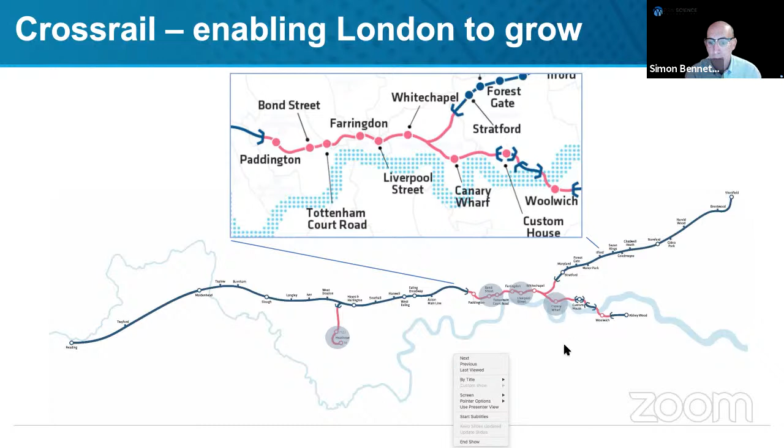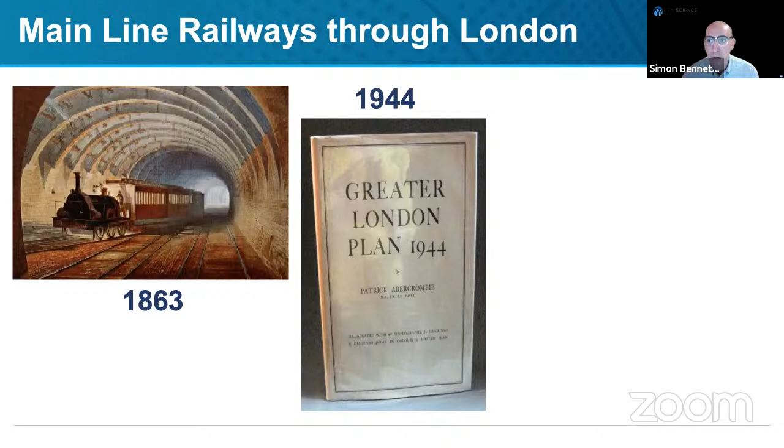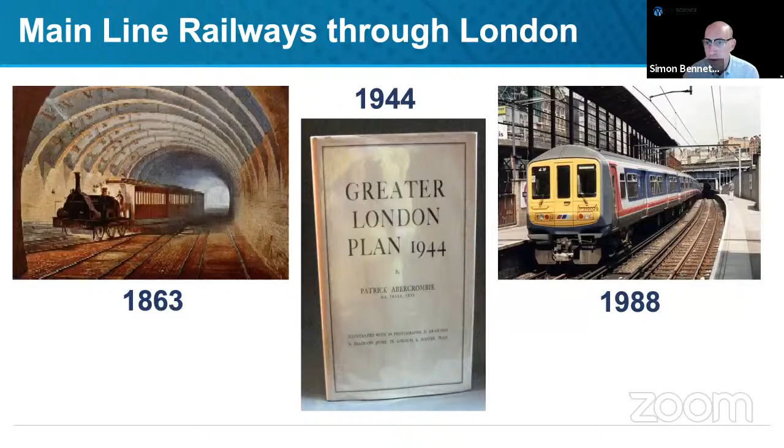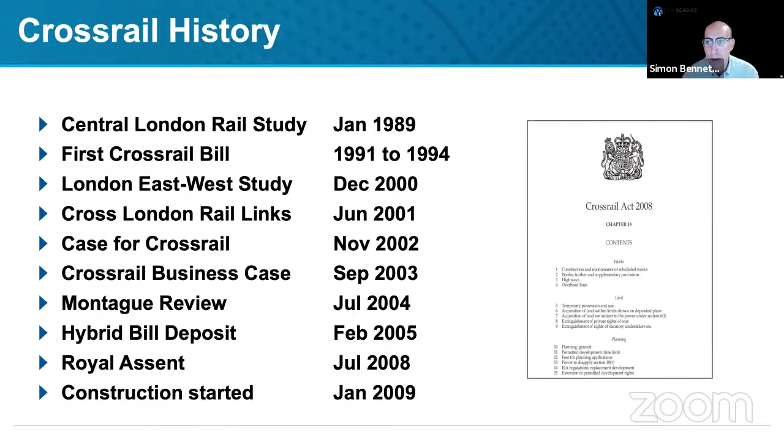And then what? Well, we have the history of the Crossrail project. There was a study done by the Department for Transport in 1989, which recommended a route east-west across London. It had a life in Parliament from 1991 to 1994, when it fell and was not taken forward. It took until 2000 for it to be resurrected, and a company was set up called Cross London Rail Links in 2001. At that point, I rejoined the organisation. We went through the process of creating a business case for the scheme in 2002, 2003. That was reviewed in 2004, and we finally got agreement to deposit a bill into Parliament in February 2005. It then took us until 2008 to get authorisation to construct the project, and construction began in January 2009.

The purpose of the railway, as I mentioned, is by providing that new capacity in the very centre of London, we create an impact on crowding on the existing underground. In plenty of areas of London, we see up to a 30% decrease in crowding on the existing underground services. Along the central line, which we directly parallel in the very centre of London, over a 30% decrease in crowding. Those are lines which were reaching their capacity and could not have continued to grow without a major scheme such as Crossrail.

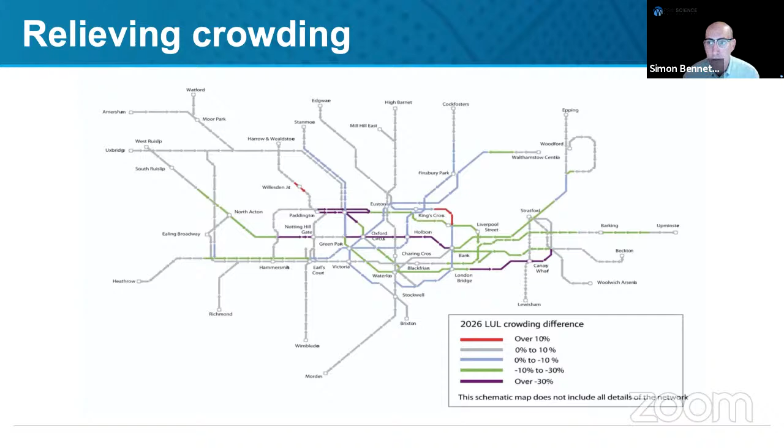We then went through the authorisation process after having passed that review. The bill in Parliament involved authorisation of our works, giving us power as the nominated undertaker to undertake the works. There are a number of requirements on the project, known as the environmental minimum requirements, which we are required to comply with, including a construction code about how our contractors must behave during construction.

A major part of the scheme is the acquisition of land, the vast majority of that being land below ground, but we do have the right to acquire that. We also have the station sites at the surface, which also needed to be acquired, and that was one of the powers that the bill gave us.

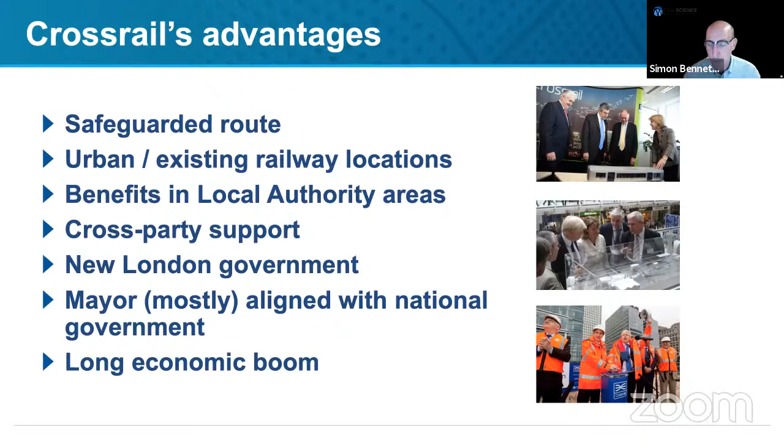Once we had the Crossrail Act, we moved into the delivery process. Here are some things which show the size of the scheme and what we had to build below ground, including 50 kilometres of track, 42 kilometres of which is brand new in tunnel, large underground spaces including a junction, and very large stations compared to underground stations - 250 metres long and much wider and larger overall than a typical underground station.

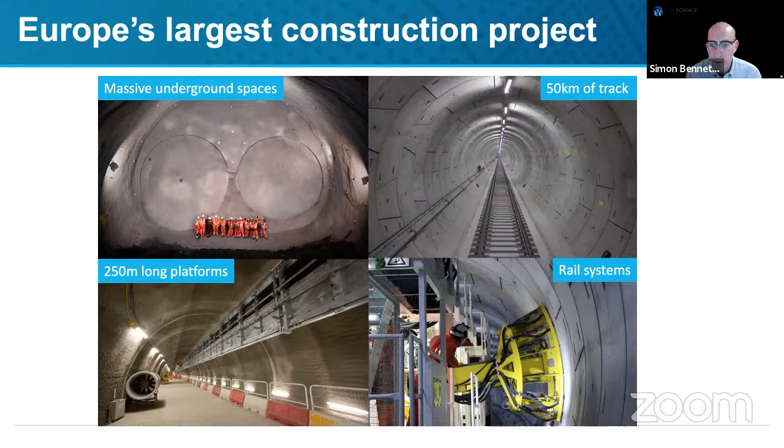In terms of governance, we are sponsored by both Transport for London and the Department for Transport, who have a joint sponsor team which sits above Crossrail and oversees it. Crossrail Limited has an independent board and an executive, and an operator which sits within Transport for London called Rail for London, who run the Elizabeth Line brand. When the project opens, it will be known as the Elizabeth Line.

In terms of funding, the reason we have those two sponsors is that the funding for the scheme comes from those two areas - the Department for Transport being national government and TfL representing London government. TfL's funding of the scheme was 1.9 billion, but it was also responsible for a larger part of the scheme through a business rate supplement levied on businesses in London, which will run into the 2030s. That additional taxation of just under 2 pence in the pound on business rates is underwriting a 5.25 billion contribution from TfL to the construction of Crossrail.

The DfT's direct funding is 4.8 billion, and there are other strands, including work on the national railway network - the existing surface routes - being done by Network Rail, of 2.3 billion. These numbers are based on the point at which we went into the scheme, and we have in fact busted this budget, and further work has been done between those organisations to fund the increase necessary to finish the railway, which I'll talk about at the end of the presentation.

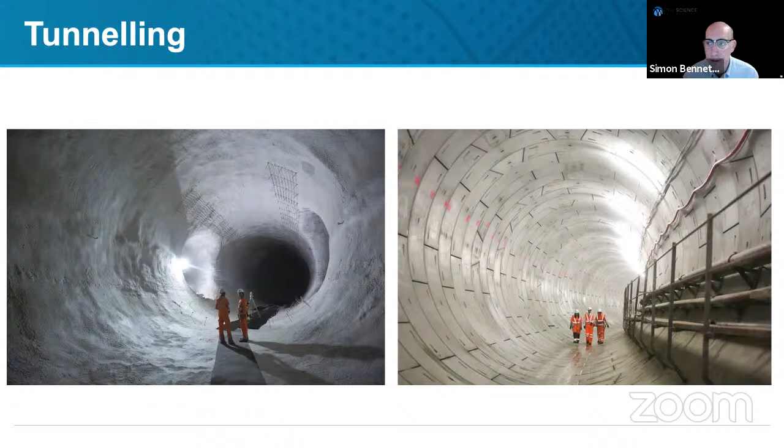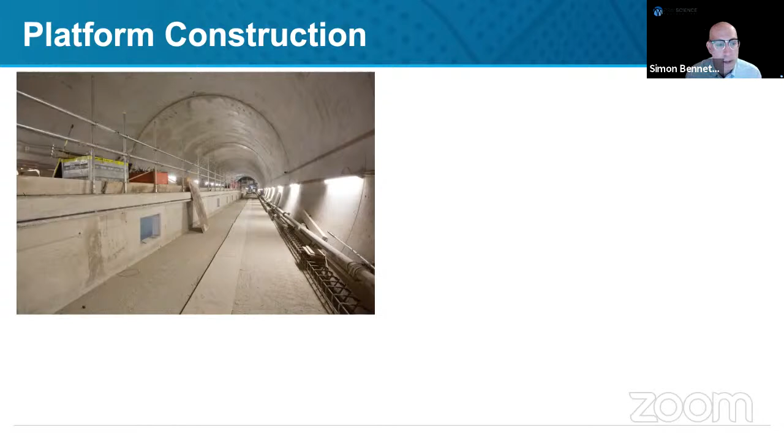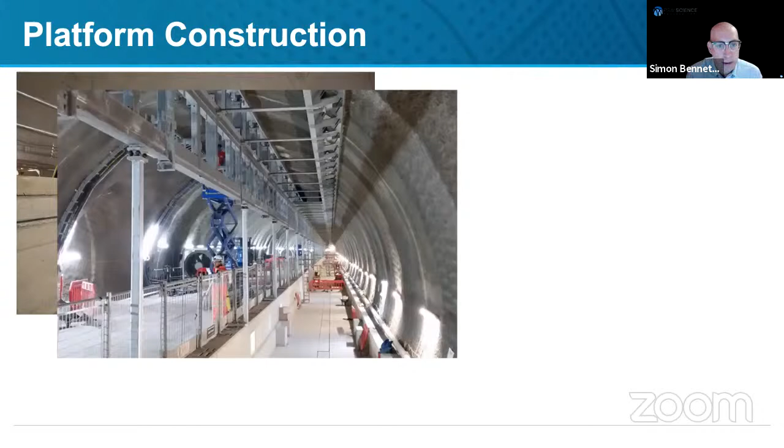In terms of construction of our platforms, once we had that sprayed concrete lined tunnel, it then received a secondary lining and then a deck for the railway and a platform structure, some of which were cast in situ and some of which were built off-site and brought in. Then we assembled our platform edge screen door supports, and you see also here some of the supports for the overhead line electrification.

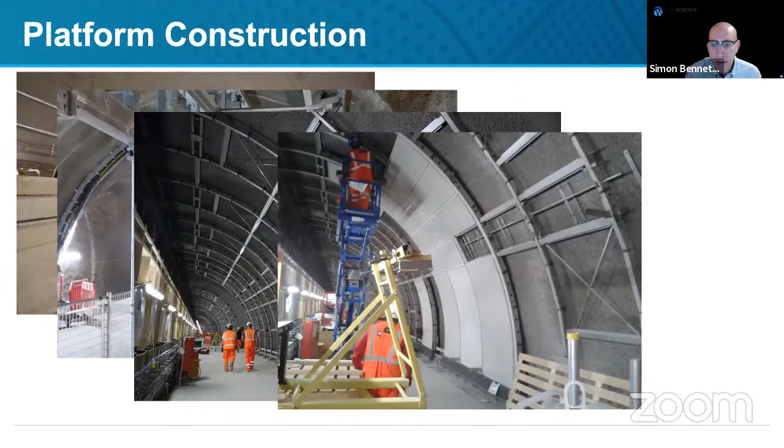Then at the back of the platform, we erected a cladding system and clad that, and resulted in stations which are much larger than an underground station, and with curving junctions between the adits and the platforms themselves.

So here are some pictures of our stations in construction and what they will look like when completed. They are now largely at this stage.

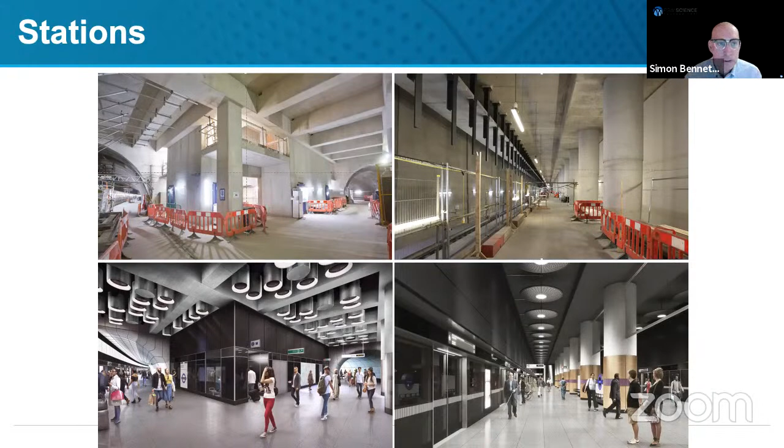And as well as the stations, we shouldn't forget our shafts and portals, which are significant items of infrastructure in their own right. Here we have in the middle at the top Stepney Green ventilation shaft. We have ventilation shafts which are part of our station buildings, which will eventually be wrapped around with developments. And here we have a portal with one of our new class 345 trains coming out of it.

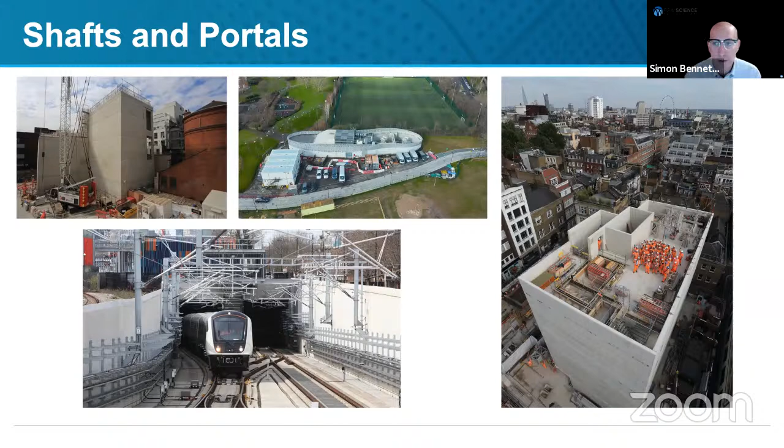So I'll now hand over to Dan to tell you about the building information modelling on the programme.

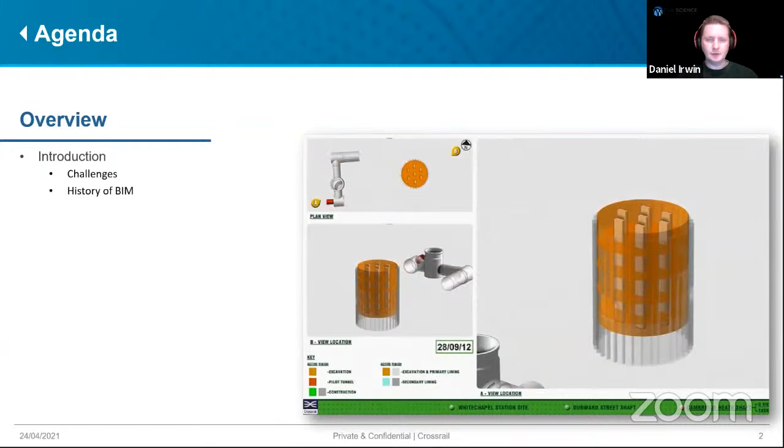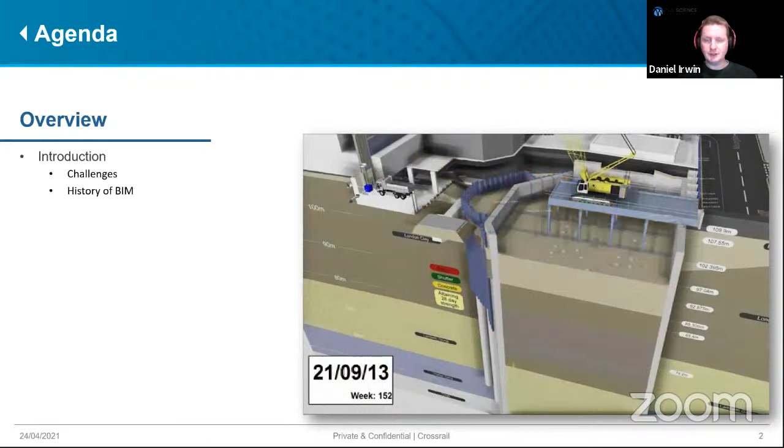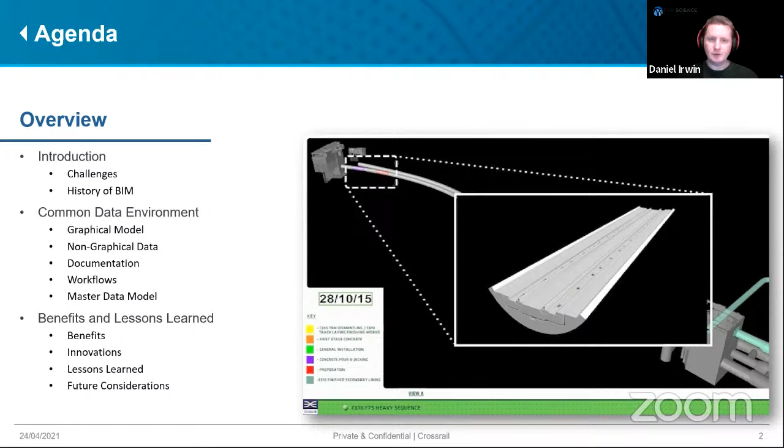So the first thing I'll do is take you through an introduction of some of the challenges we faced, as well as what the history of building information looked like throughout the course of this project and how we had to adapt and evolve along with that. Then I'll take you through our common data environment. This is the framework and systems that we put in place to support a lot of the construction that went on, and you can see an example of some of the output of that on your right. This is showing how some of the construction sequencing would happen. And then lastly, I'll talk about some of the benefits, some of the things that worked for us, and some of the innovations that we used, as well as some of the lessons learned, some of the things that didn't go so well, and some future considerations for any future infrastructure projects that might come into play.

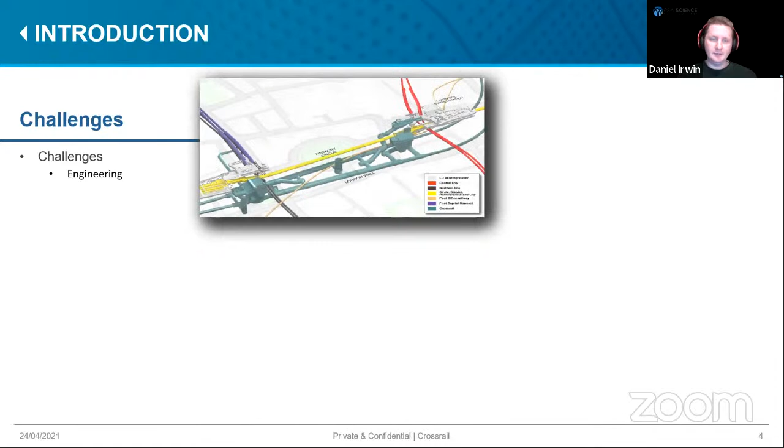So into the introduction. First of all, challenges. One of the biggest challenges that Crossrail faced when constructing this railway was that we had to go under London, which is over 2,000 years old and as such has a very varied infrastructure buried underneath it. What you can see in this slide shows an example at Liverpool Street Station of the existing infrastructure that was already in place before Crossrail came in. And what you should see in the middle is the Crossrail station that was being built, and that included a post office tunnel that had to route straight through that.

And what this doesn't show, and which actually was more prevalent as well, was all of the buried utilities, of which there were hundreds of kilometres of pipes and electrical cabling that had to be managed, as well as places like archaeology sites where we had to be very wary of what we were trying to get involved with.

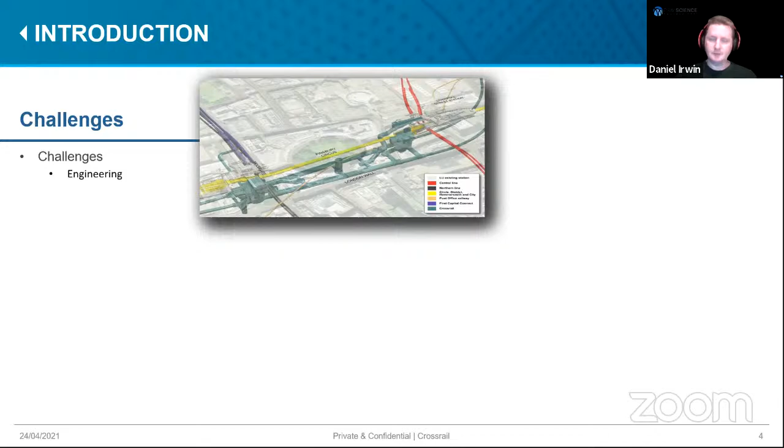Because of this, we had to be exceedingly accurate. The example here shows what was called threading the eye of the needle. This was where one of the tunnel boring machines was passing through Tottenham Court Road Station, and the yellow you can see here is the route that the TBM would take through the station. The blue above it are the foundation pilings of the station itself, and the red below is the platform for the Northern Line, which ran through that station.

And the tolerances were exceedingly tight. The actual gap that we had between the tunnel boring machine and the foundation pilings above was about 50 centimetres. So we had about half a metre to spare, and about 80 centimetres below. And because of this, we had to be exceedingly accurate with what we were doing—so much so that we actually developed our own custom coordinate system to minimize the linear distortion you get with certain projections when dealing with this sort of stuff.

As opposed to a national coordinate system in the UK where distortion can be up to 400 millimeters over a kilometre, we got that down through the use of London Survey Grid in the central operating section to about 5 millimeters in some places. We were so sure of the accuracy of this that when we came to doing the work, there was only a short pause in the use of the Northern Line below whilst we came through. For the most part, it remained open.

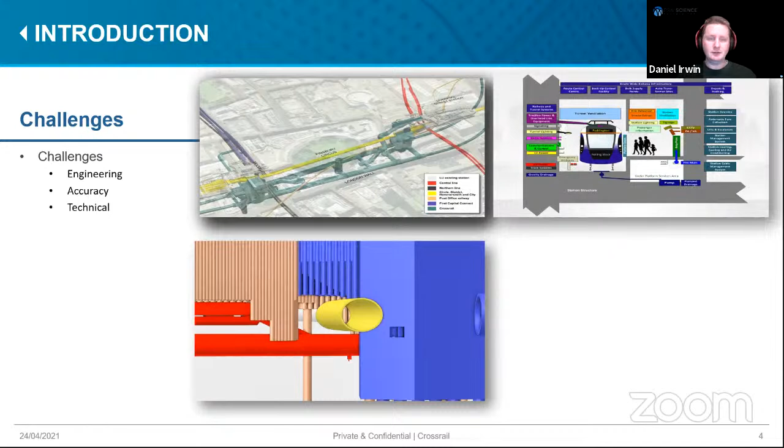The next challenge we had was technical. We are trying to fit a 21st century railway into all of this, and we had to deal with a number of different systems from rolling stock through to systems, comms, fire safety, and all of this needed to be integrated to be able to talk to each other. It was going to be a very complex build.

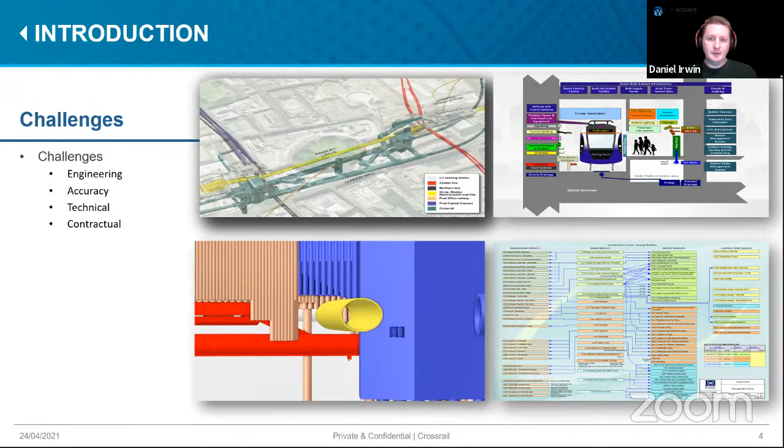Lastly, we had a contractual challenge. We had a program of work that encompassed around 50 projects and around 200 primary contractors, and all of those needed to be able to collaborate with ourselves and also with each other.

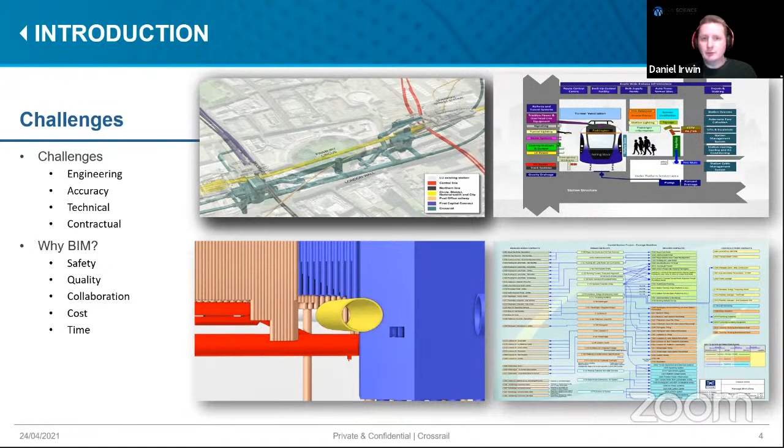So why use building information modeling? Essentially, there were a number of requirements here. We wanted to build a safe railway, and we didn't want anyone to come to any harm during the course of the build. We also wanted to build a world-class railway, something that was of the highest quality. As was mentioned earlier, we needed to be able to collaborate with our contractors and our clients in order to make that build happen, and of course we wanted to reduce the costs and the time taken to complete that build.

Just a brief history of Crossrail with building information modeling. Back in 2008, when Royal Assent was first given, building information modeling was a very new subject matter. It wasn't very widely known. In the UK, at least, there was only one standard that applied to this, known as BS 1192 Part 1. It had only come out the year before, but it talked about the use of collaborative workflows and common data environments to support the construction industry. As a result, what we started to build in 2008 onwards in terms of systems to help manage this mammoth project used that standard as a starting point.

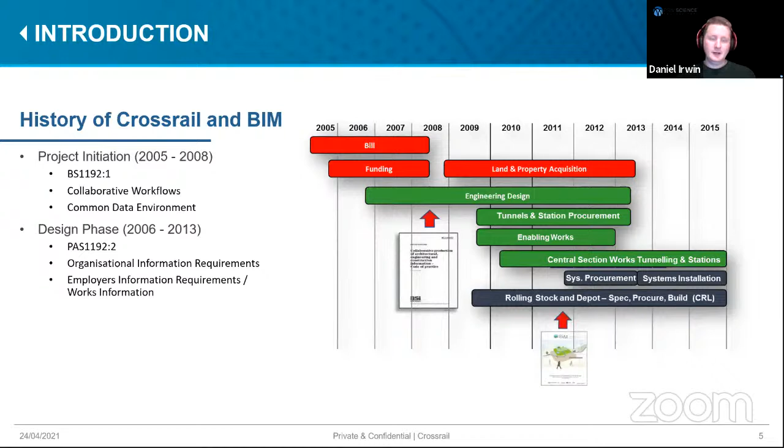When we started to move into the design phase, we found there were new standards starting to emerge. We had PAS 1192 Part 2 coming along around 2011, 2012, which was around the construction part of a building information model project. But we were already on the ground doing things, and it was very difficult for us to just stop what we were doing and say, right, hang on a minute, there's a new standard come out, we need to go back and change everything. So we weren't really obliged to follow some of the things like organizational information requirements or employers' information requirements that are stated and listed out in that standard.

What we did have as part of the contract that we would let is the works information. This was a contractual document that we would give to our contractors, which told them what information, both digitally and physically, we were expecting to get back from them. This followed very closely what the employer's information requirements set out. Then once we got into the construction phase, we started to see things like PAS 1192 Part 3 come in, which was more around the handover into operations and maintenance and standards around that. Unfortunately, again, we couldn't really stop what we were doing. What we did do is try to rationalize a lot of the data we were creating in terms of what we would hand over to the operator, to try and fit as best we could those standards as they emerged.

So I'm going to talk now about our common data environment. What did we set up and how did we set it up? Primarily, the common data environment is really what our asset information model should be. These are the three primary data sets used to run the structure or the infrastructure project once it's commissioned, and this is broken down into three components.

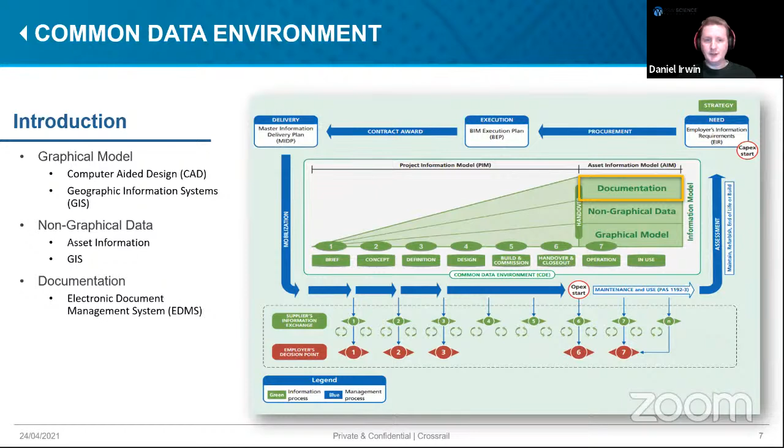Then the third part was documentation. As good as a graphical model or non-graphical data can be, you still need documents to help support that railway once it's in operations. That might be health and safety files, operation manuals, and the like. So we had an EDMS set up for that purpose.

The three of those together formed what we call the triumvirate of our common data environment. There were other components to this, and it wasn't just those three, but for the purpose of this we're just going to focus on those. So we're going to look at the graphical model part first.

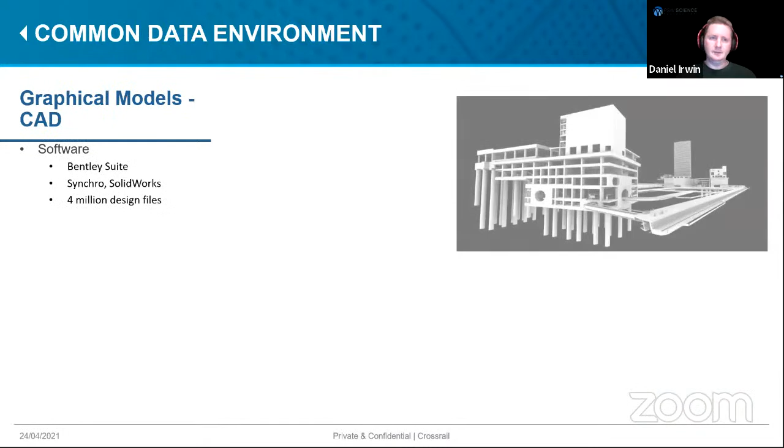This was the CAD side of things, and what we went out and procured shortly after Royal Assent was given was a product called ProjectWise. This is a CAD design management tool which allowed us to centralize the design files being generated as part of this project. Latterly, we also started using things like Synchro and SolidWorks for some other purposes, which I'll come on to later.

In total, we've produced so far, I think, about 4 million design files loaded into that system, and it's used by all of the contractors - both ourselves and the contractors - and they work with each other.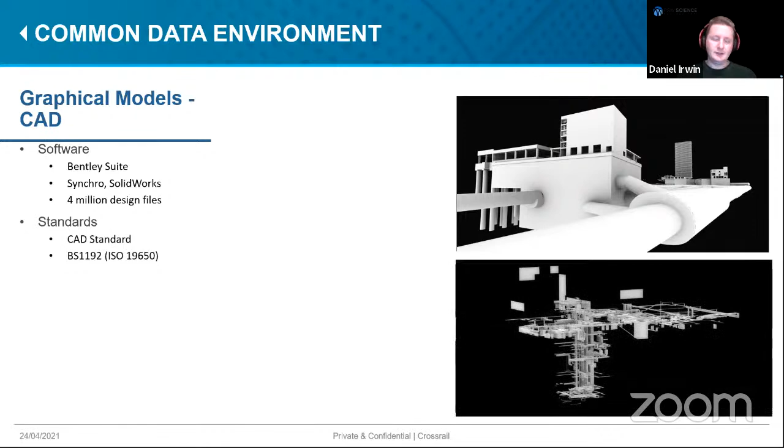Again, there are CAD standards around that. So we built a standard to ensure that all of the data being created was consistent and to a certain quality. That included, for example, all of the design files being generated using our custom coordinate system, London Survey Grid, so that you could overlay two models from two different contractors and have them fit perfectly.

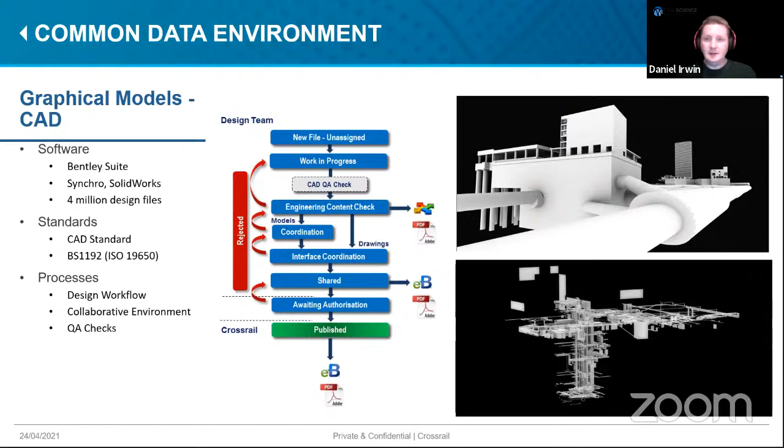And we introduced a process based on BS 1192, which enabled us to make sure the right checks were being carried out on those design files as part of that process. This included CAD QA checks, engineering content checks, and specifically interface coordination. We needed to make sure that one contractor doing civils wasn't impeding on the work that structural engineers were making, or that the MEP guys would be doing.

And that sort of data would include all sorts of things - civils, structural, architectural, mechanical, electrical - but also fire safety, track, and all sorts of other data sets.

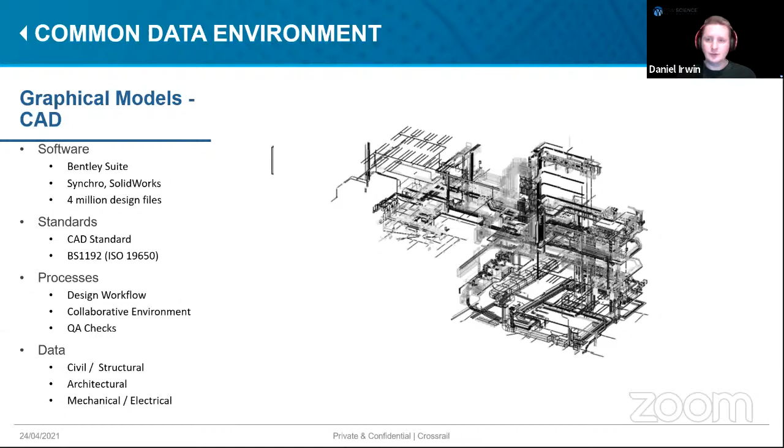In terms of the GIS, we used a number of different tools over the course of the project, mostly from Bentley and Esri, and this included desktop, web, and mobile technologies.

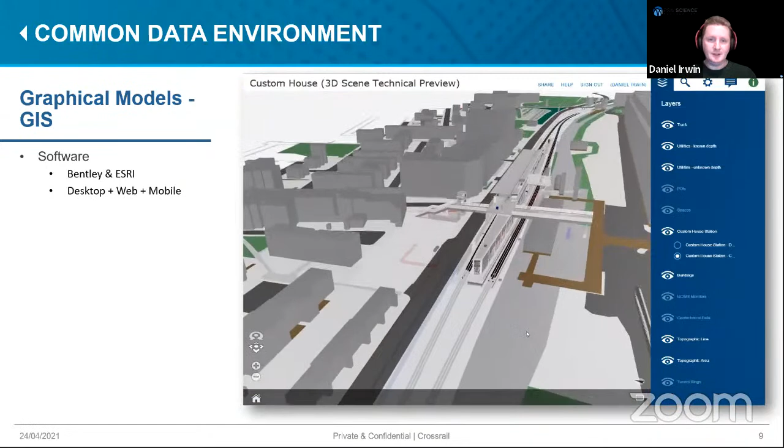What you're seeing here is a blending of both the GIS data, or some of the GIS data that we had, with the CAD data, so that the model of the station here at Custom House was actually coming from the CAD models. There are about 30 or 40 CAD models there in the center, and then we're using the GIS to show its surroundings and other data sets that were available within the GIS, and creating our own as well. So you can see here the actual rooms, for example.

Again, this did have a number of standards associated with it. So we had a geographic information standard, data and metadata standards, as well as the coordinate system standard.

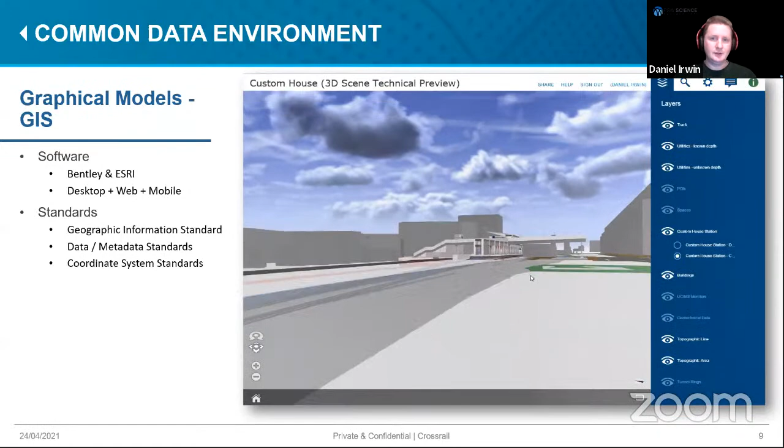In total, there are about 57 work instructions that we created that would allow us to manage all of the various content we were creating as part of this, from cradle to grave in that sense.

And some of those data sets included environmental data sets, geotechnical data sets, land survey, and topographical data, and a whole host more. Again, these were just some of those.

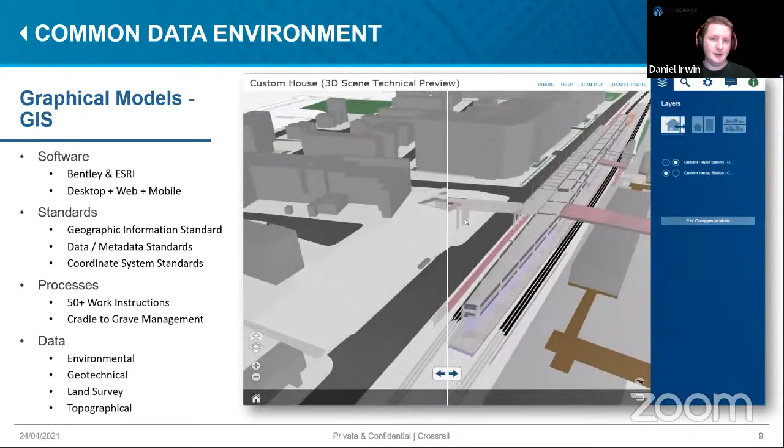What you can see is us showing our points of interest, and we can actually go on and see the model in two different views now. So what we're going to do is show - we've loaded both the original design for Custom House Station and the final construction models - and you can see the difference between the two, what changed during the course of the design.

What we can also do is start to interrogate this - we can actually find information that we're looking for. And this is where the power of having the information behind these models really works.

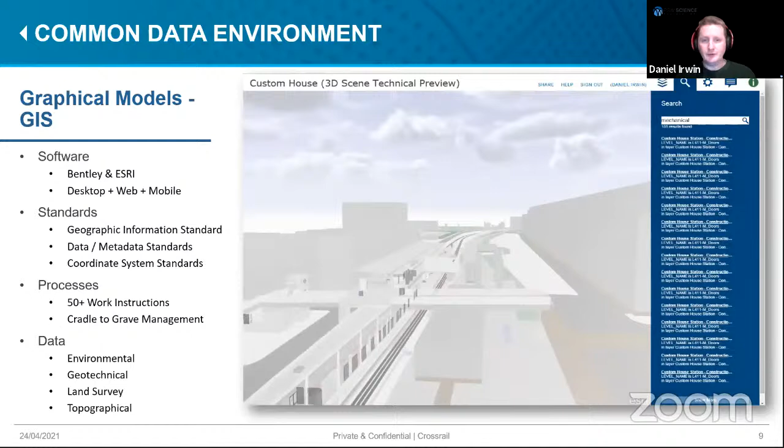Here we're searching for lights, so this is finding us all of the lighting structures within that particular station. We can also search for doors, as I'm about to do, and see all of the doors in that station. Or we can be slightly more generic and just search for mechanical components, and what you're going to see next is all of the mechanical components within that station. So again, it made it very easy for users to interrogate and find what they're looking for.

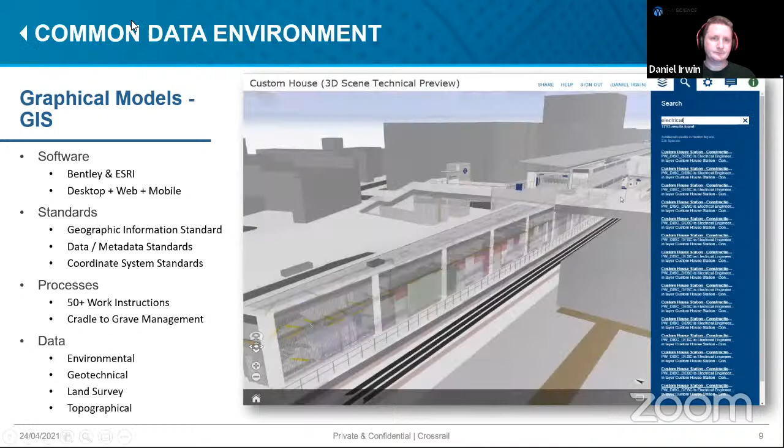But we went beyond 3D as well. We did quite an awful lot in 4D modeling. And what this is applying those 3D models and linking it to the work schedule that we were carrying out.

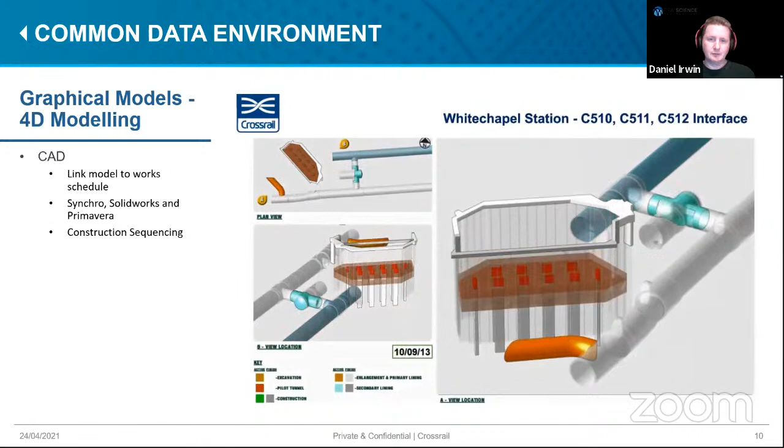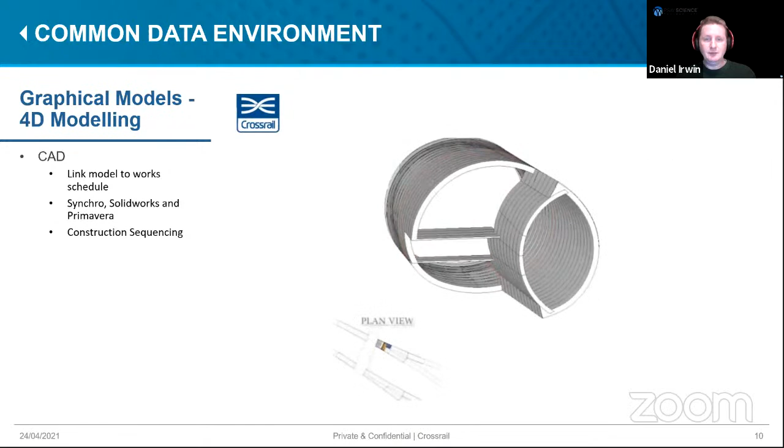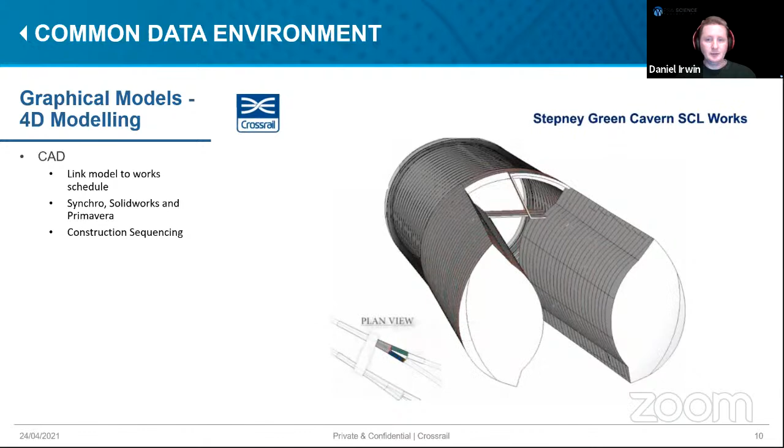So there was a product called Primavera, which we used for our works management, and we linked in the 3D models and could apply that to create construction sequencing. And this could be done before we actually went on site and started to dig. So we could actually see what was going to happen before it would happen. And this allowed us to understand the pitfalls and pick up any problems that might occur as a result of that, but also have a baseline to say what should be happening at that moment in time.

We did something similar with the GIS, so we did some spatio-temporal analysis, and what this was about was understanding who was where and when. What this specifically was in relation to was we had sensors, hundreds of thousands of sensors across the work sites, which were monitoring particularly the movement of things as a result of the TBMs passing through. After they passed through, there was expected to be some settlement behind them, but also there was noise and vibration issues that might potentially have thrown themselves.

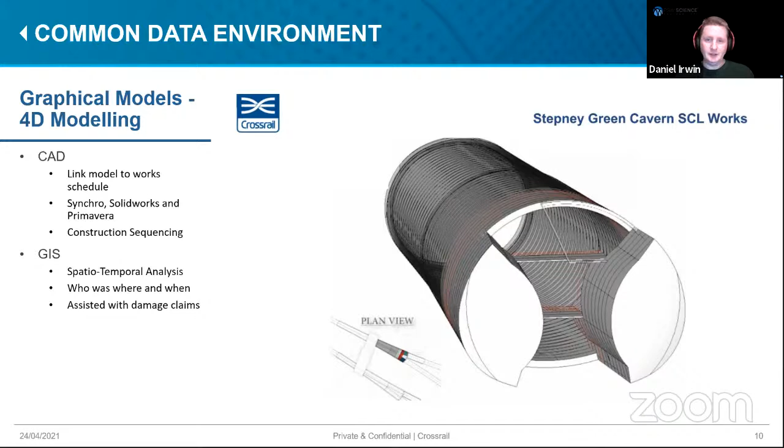And if claims came in subsequently, it allowed us to go back in time to review the sensors at that point in time when the damage was supposed to have occurred, to review the position of the TBM and anything else that might have been going on at that location, and to understand whether or not the claim was valid or not.

So moving on to non-graphical data, we, as I mentioned, were trying to create an asset information system whilst we were moving through. Typically on construction projects in the past, we have found that asset information is collected either at the end of the project or not at all. And as a result, the operations and maintenance costs skyrocket because you don't know what's there, you don't know where things are, you don't know how they've been built.

So we had to create about 600,000 assets, give or take. And we built a system, our asset information management system, actually inside of our document management system, which allowed us to relate documents to our assets as well. And this started off using Uniclass as a standard, although we found very early on that Uniclass didn't really work very well for rail. It was fine for buildings, but for rail infrastructure, it didn't work so well.

And obviously, we were looking at things like ISO 55000 and PAS 1192 Part 3, which I mentioned earlier. And ultimately, what we created were our asset data dictionary definition documents - apologies, it's a bit of a mouthful, which we called AD4s for that reason. And what these were, a document for every single asset class that we were potentially creating, explaining exactly what attribution we needed to be associated with those assets, and how they should be collected, what they should look like.

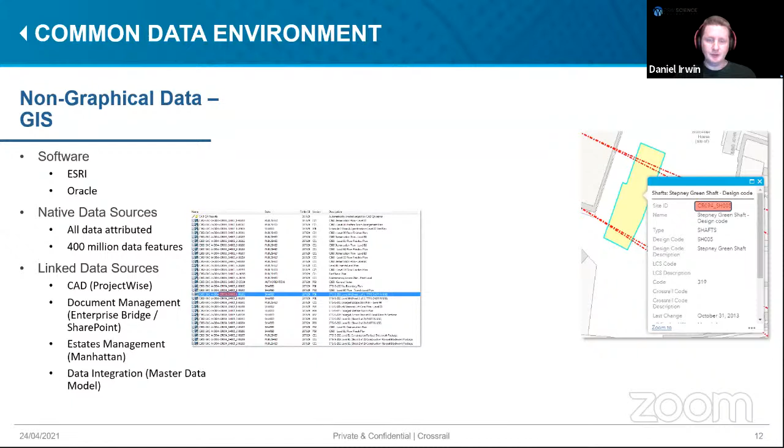What that meant is we could start attaching things to it. We could start creating relationships. We could actually start seeing those drawings inside the GIS and making them available through a single interface for users to be able to go and find them.

And we could actually round trip the whole thing. You could go from ProjectWise to the GIS and back again, or you could open a PDF rendition of that document. And because most people didn't have CAD software on their machines, but they did have a PDF reader.

Having a PDF made available to them and having those drawings made available to them made it much, much easier.

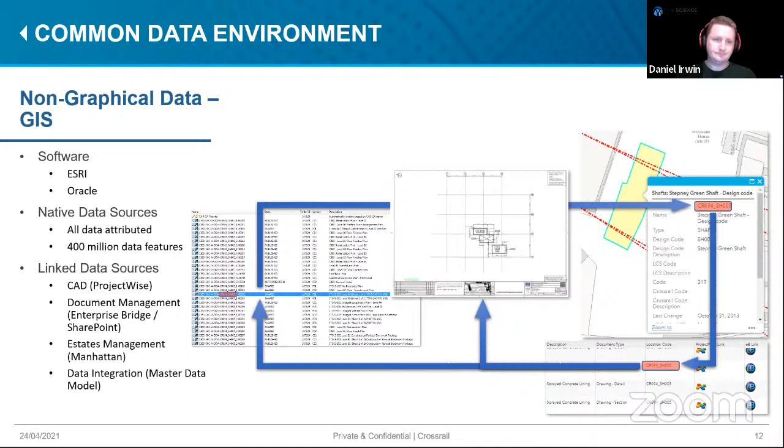And then finally, we come on to documentation. Again, we use Enterprise Bridge, which is a web-based tool for hosting documents. I think, at the moment, we have about 6 million documents in that system, covering a wide range of things. We use a number of different standards in order to build that.

But ultimately, the process was that we would have central document controllers who would sit inside of Crossrail Limited, and they would manage site-based document managers that would be associated with the contractors and help them, assist them to create documents, to upload documents, to manage the documents within that system.

But it was one system that everybody used. And again, the sorts of data that we're creating were health and safety files, operation manuals, and also PDF renditions of drawings, as I mentioned, from the CAD system.

But what Enterprise Bridge did, and what that system did as well, was not just document management. That was one strand of what it actually did. It was also managing our contracts, our asset breakdown structure, as we saw earlier when looking at our asset information.

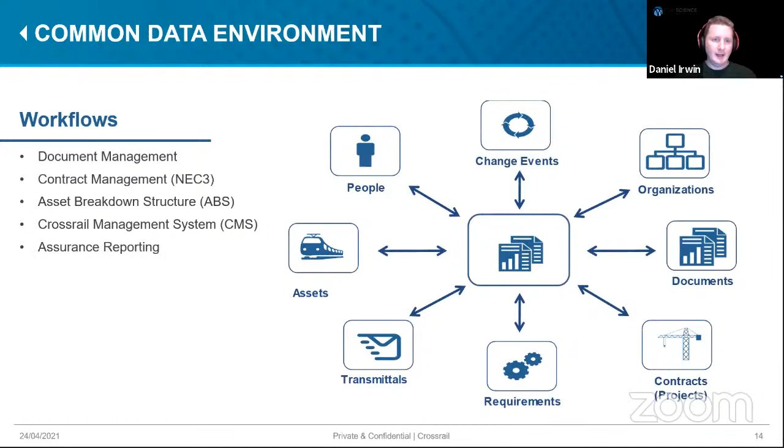Our Crossrail management system, which essentially was where our standards were kept and where our other policies and procedures were stored. Our assurance reporting, our materials compliance, the list goes on.

And lastly, I wanted to talk about the master data model. Now, this essentially underpins everything we've just talked about.

It didn't exist at the beginning of the project, and it was realized fairly early on that we did have disparate systems. We had a document management system and a CAD system and a GIS system and other systems out there, but they weren't talking to each other.

And because they weren't talking to each other, it meant that people were going off and naming things what they wanted to name them. There was no standard around naming conventions. There was no consistency around the naming conventions.

And so this tool was built to help to manage that, to make sure that there was consistency between these different systems and act as an integration tool between them.

It was a custom piece of software. It was built in-house, web-based. And essentially what happened was we had data owners.

I myself was the data owner for the location part that you can see here. And this is where change would happen. If we had to change the code for something, a station or a shaft or a portal, we would change it in this location here. And then that would be our configuration management.

And then the other systems would either have that pushed out to them or would pull it, depending on the system. But it meant that the systems were in sync and we could actually rely on the consistency.

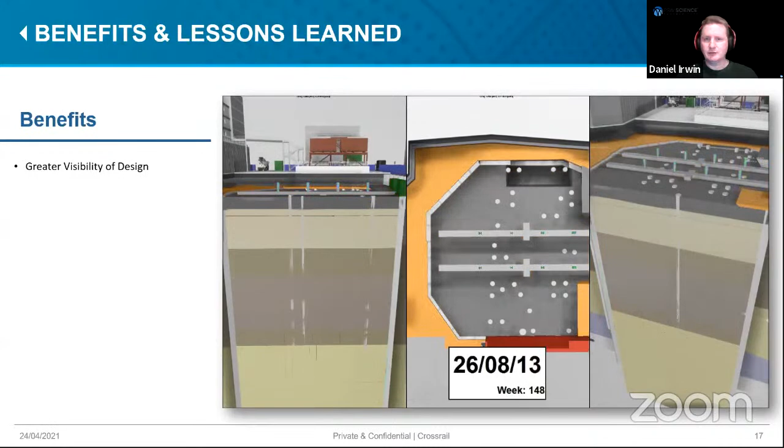Well, the first thing it did was give us great visibility of design. We could understand what was happening out on site even before it started. As I mentioned, with the construction sequencing, it meant we could understand what we were doing before we went out. It also meant we had better management of that design.

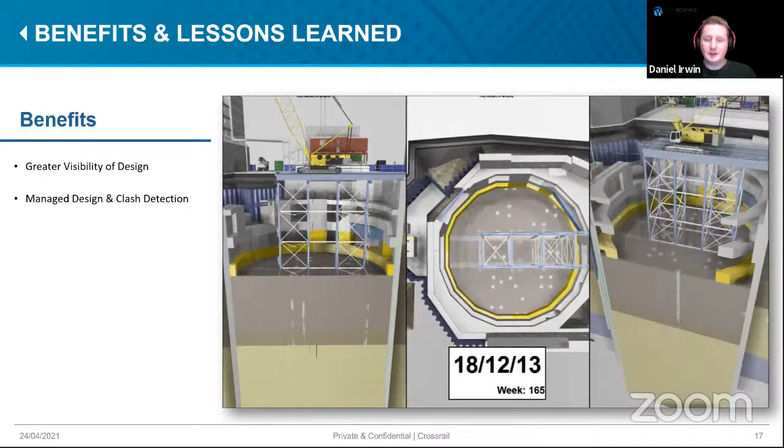We could actually use that to do things like clash detection. Having those models, particularly the coordination models that were generated, meant we could cross-discipline check to make sure that what someone was building from a civils perspective wasn't going to be impacted by something an MEP engineer was going to be making.

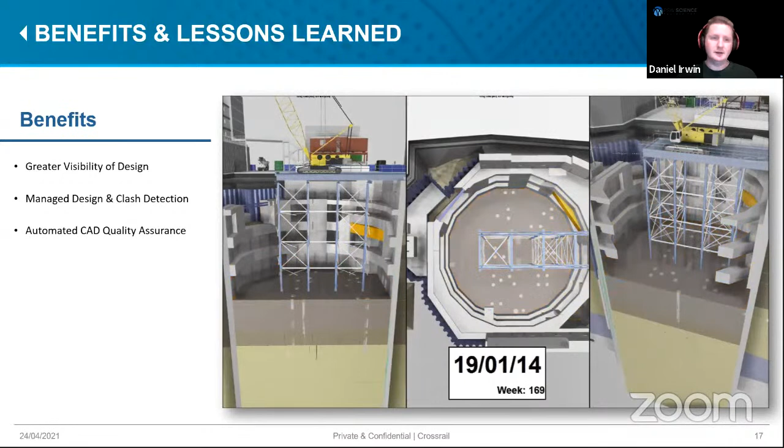Again, we mentioned the automation of the CAD quality assurance, and what that meant was that people didn't have to worry about whether it fitted in terms of the level naming conventions, the global positionings. That was all done as part of that quality assurance. And that meant the data had integrity. It meant that people trusted it. It meant they actually understood that everything was going to be of that same quality.

And it also meant that we could apply better resource management. Again, with something like the construction sequencing, we could see exactly what was going to happen, and we knew what was needed and when, both in terms of material, people, and time.

And we understood the physical environment better. We go back to the example of the TBMs passing through the ground, and actually knowing where all of these buried structures were before we started that piece of work meant we could do a lot of work to overcome those challenges before we ran into them.

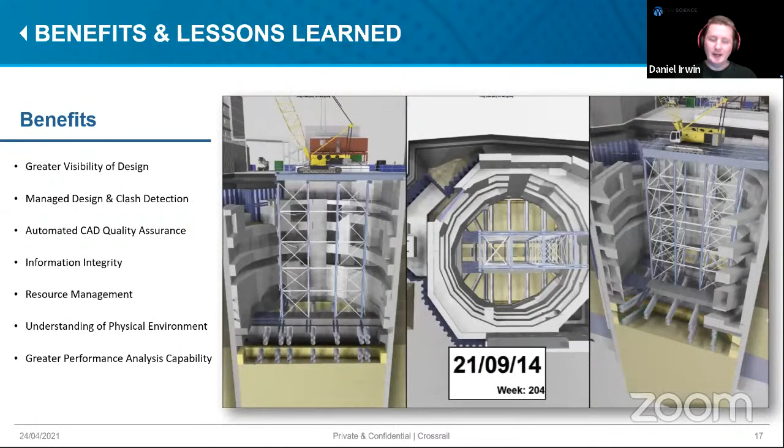And it also meant we had greater performance analysis capability. It meant we could actually analyze where we said we would be at a given moment in time against where we actually were. You'll see this in the next slide in terms of our innovations.

So we had a whole series, there was a whole program called Innovate18, which actually looked at using innovations to help Crossrail. The first of which, I'm just going to pick on a few here, the first of which was Bluetooth low energy beacons.

One of the big problems we had when you were out on site is that you couldn't geolocate yourself when you were using a mobile device. So we put in Bluetooth low energy beacons to help that geolocation.

And this became particularly useful when we started looking at augmented reality. This was something where we actually took those 4D models that we were producing and put them onto mobile devices and put them out on site.

So actually what you could do is overlay the 4D model at a given moment in time, showing where we should have been in terms of the construction, and relay that against what was actually being built. So we could do that performance analysis on site.

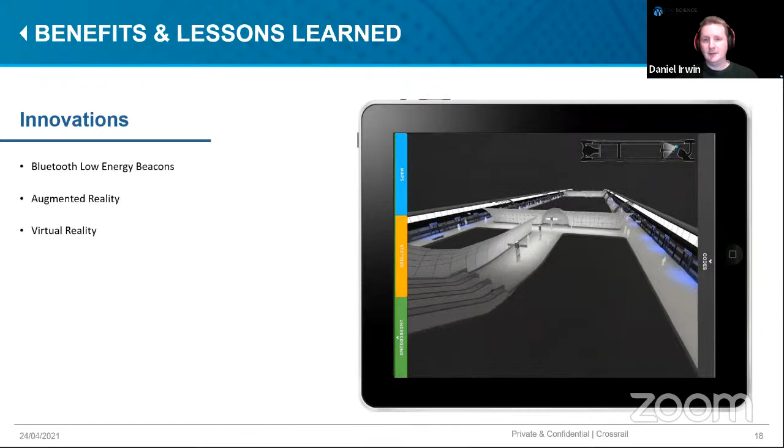We also played with virtual reality. Here is an example of an app that was put together that again took those models and the information we were collecting throughout the course of the project and made it very accessible to users, able to walk around the station and understand it, which is very useful for station operators and maintainers to familiarize themselves with the stations before they were even ready to be used.

And we also did on-site document verification. Traditionally, someone would go on site with a document relating to a piece of work, and it might be a hard copy or a PDF downloaded onto their device. But quite often it wasn't the right version, as it had changed since they had looked at it.

Having this app on your phone, you could simply scan a QR code and it would check and tell you whether or not you were using the right version of the document. And if you weren't, it would give you the option to take you to the correct version to use.

We also implemented virtual information structures. This was more around our asset information, but the way it was designed using object-oriented design of that data meant that we could repackage it to fit a different purpose.

When we collected the information, it was very contractor-centric. We had contracts and they would deliver back asset information to us. But when we want to hand over to the operator or maintainer, they're not really interested in the contractor perspective. They're interested in the operations perspective that is more facility-based. Having these virtual information structures in place meant that we could recontainerize that information and package it in a way that could be accepted by the people we were handing over to.

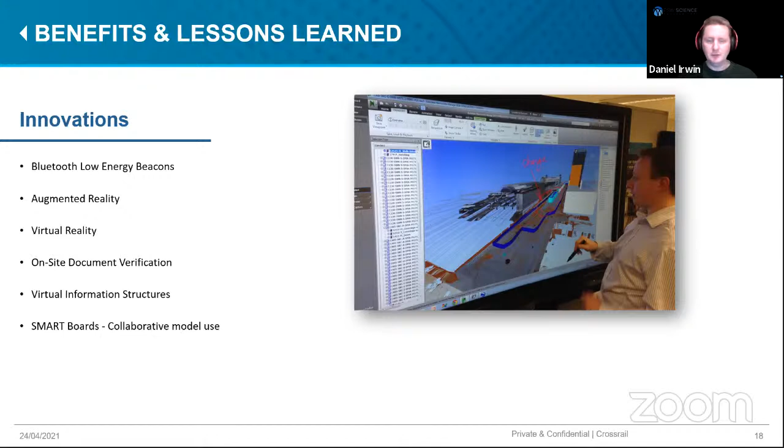We also use smart boards, particularly during design reviews. Once we got to a certain part of the design lifecycle, there would be a design review carried out, and we would have smart boards in the room with the coordination models loaded up, which people could interact with in the room, rather than having sheets of paper or flat documents to work from. They could interact with that model and understand it far more intuitively than by other means.

And then there was the use of mobile GIS, which we started using halfway through the project. Primarily what we used this for was data gathering exercises whilst out on site, but particularly for managing our site boundaries.

We had a number of construction sites around London, and we had to be very careful about the hoarding we placed around those to make sure it was in the right place. What we didn't want was hoarding being placed where it shouldn't, trespassing on land that wasn't ours, or conversely, not putting hoarding where we should, where we were responsible for any accidents that might happen. So we used the mobile GIS to allow users on site to see where the hoardings were or should be, to geolocate themselves and figure out whether they were actually in the right place.

In terms of benefits realization, as I mentioned at the beginning, there were a number of reasons why we wanted to use building information modeling. The first of which was safety.

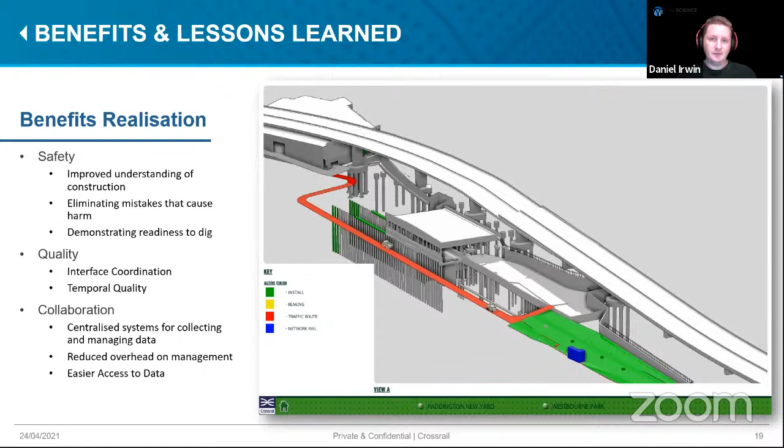In terms of some specific cost and time savings, there are a number of different things we did with CAD that helped us with what we were doing. On average, we were looking at about 31 person days a month per contract being saved because of these tools. It reduced the repetition of tasks. We automated a lot of things to reduce that repetition, and it just made things happen much more smoothly.

From the GIS perspective, the intelligent design and integration of GIS with CAD improved early planning in particular. A retrospective analysis of the design of the actual routes found that because of what we'd done with both CAD and GIS integration, we were saving about 5,000 hours a year worth of rework that would otherwise have had to be done. Most people found about a 15% decrease in the time it took to find things, because they could go through a single spatial platform, which made things easier to find.

In the case of the estates management team, which was looking at the occupation and ownership of the sites during construction, they found that they actually reduced the time it took them to create and manage that information by 75%. And it saved them about £120,000 per year.

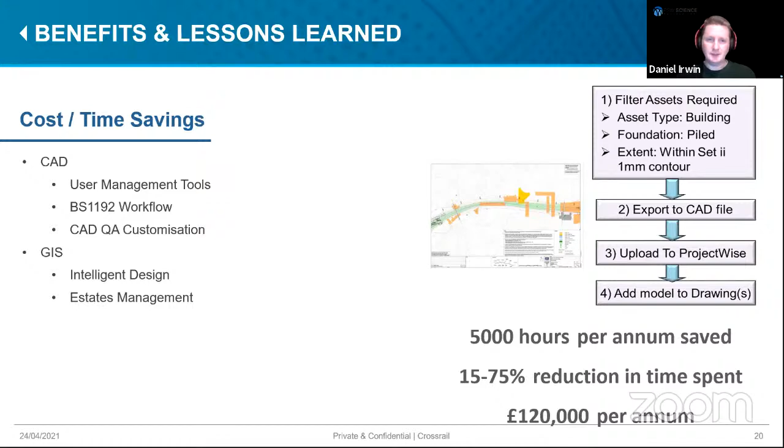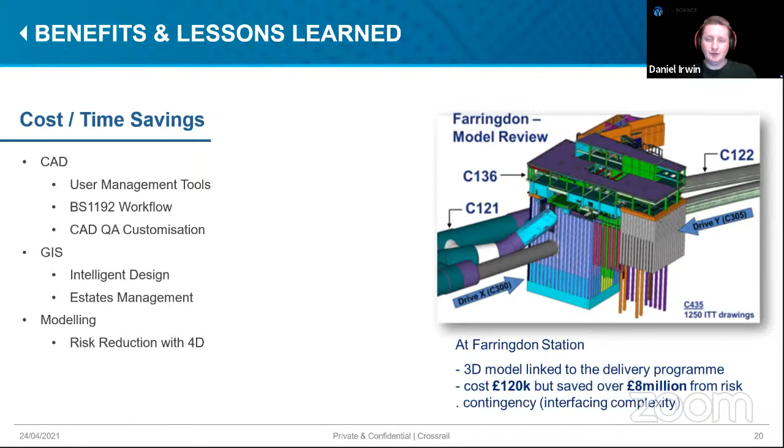From a modeling perspective, we've already seen many examples of construction sequencing. At Farringdon Station, we created a 3D model and linked it to the delivery program. It cost us money to create - that cost us £120,000 to put together. But what it did do is reduce our risk contingency by 8 million, because we were able to prove that we were ready and that there were no issues we would run into during construction.

And then lastly, there was asset information management. Now, we weren't going to save any money creating asset information. As I said before, mostly asset information is collected at the end, or not at all. So anything we were doing during the project was going to cost. However, if we didn't collect that information, it was forecast that the costs of operation and maintenance of the railway afterwards would increase by up to 20 to 25%.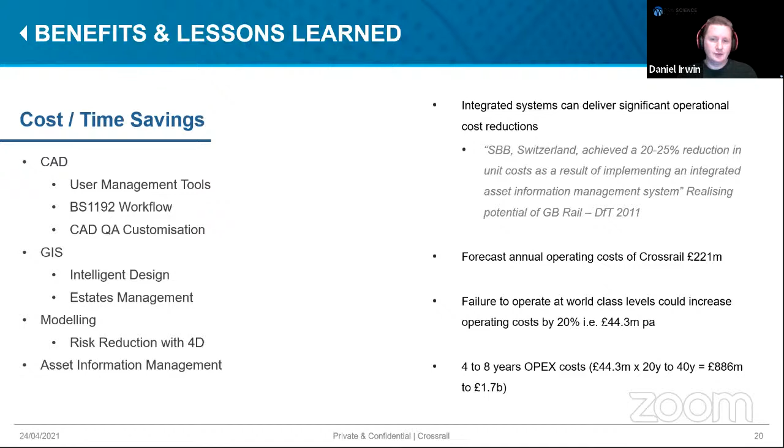Bear in mind, we've been at this for 10 years, and the operational lifespan of Crossrail is estimated at 120 years. So when you start to look at the savings you can make, which worked out to be about 44 million a year by having this information up front, and extend that out over 20 or 40 years, you now find yourself looking at savings of 800 million to 1.7 billion pounds.

But we did also have some early contract issues. Some of the contracts were let before we had these systems in place. And I guess the lesson learned here is that what was given back to us wasn't fit for purpose for what we needed it for. We've had to do a lot of rework to get that back in place, and we're still paying the price now.

We also found, because we had these big centralized systems, we started to suffer from vendor and even version lock-in. It was very difficult, once we were using a particular piece of software, to actually go off and use something else. We couldn't even change versions of the software, and we started to lag behind as the project continued to deliver, and the software would become out of support.

We also found that some software was being developed more from an IT and technology perspective rather than what was actually needed on the ground. As a result, we did see costs spiral in terms of what was being developed, and what was being developed didn't necessarily fit what we needed.

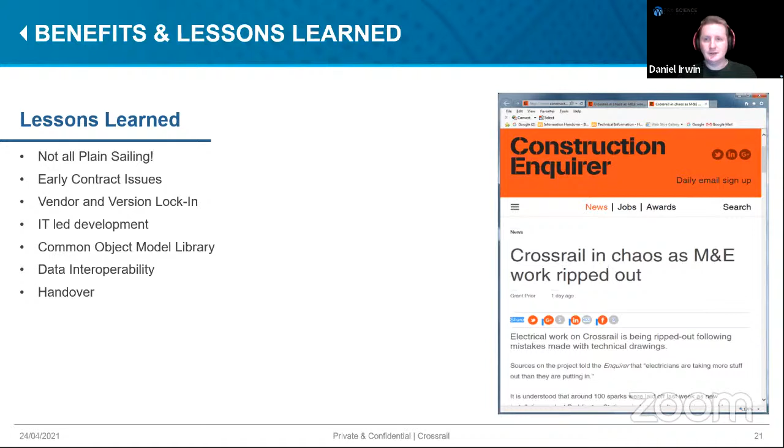So just in terms of future considerations to wrap up, if we could go back and do it all again - and I'm sure we wouldn't - one of the first things we'd do is probably look at requirements. We needed to establish them as early as possible, and where we didn't do that early enough, we saw issues. We needed to understand what the client wants more. There was some disparity between what we thought the client wanted and what the client actually wanted. Getting a clear understanding of those requirements much earlier in the process would have helped us an awful lot more. And in terms of asset classification as well, that really was key to understanding what assets we were going to be building and what assets we were going to hand over.

In terms of data configuration management, we became a very data-centric organization. Historically, I don't think construction projects have ever created this much content as part of the project. And although we created a lot of data, with quality assurance and model reviews and everything else that went with that, we maybe didn't treat that data as the valuable resource that it actually is. Going forward into operations and maintenance, we're going to find more and more that data is going to drive our maintenance regimes. Certainly the use of relational data models from the start would have helped save us more money.

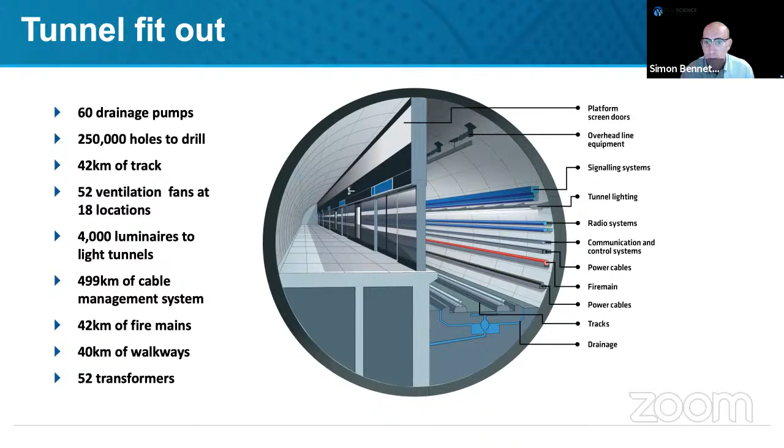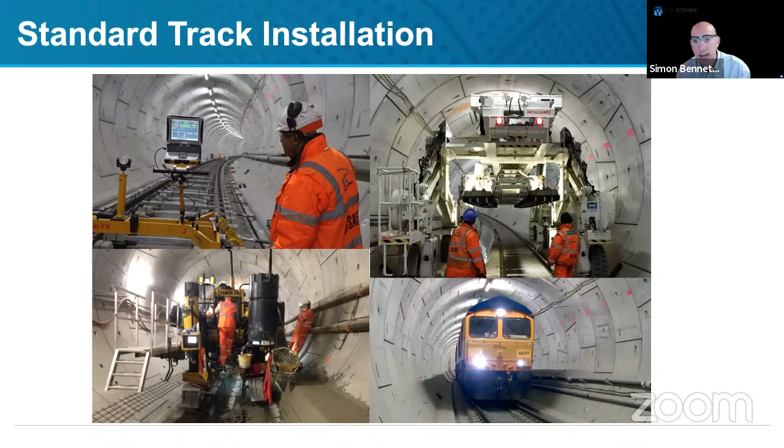So we have the tunnel systems. We also had to have our track installation, and here I wanted to talk specifically about the types of track we used. Here we see a track being installed in the running tunnels in the normal way, brought in as panels and then concreted in.

But we also had floating slab track, which is cast into a resilient substrate that reduces the amount of vibration and therefore noise and re-radiated vibration into buildings above.

There are a couple of areas in London where there are significant receptors which are very sensitive. That would be in Soho, just south of Oxford Street, where a lot of our film studios and recording studios are. Throughout that whole area, we were required to use floating slab track.

And very particularly under the Barbican Concert Hall in the City of London, we were actually required to provide a very specific type of track, which was on springs rather than a resilient pad. That was phenomenally expensive and ended up being way beyond what was necessary to protect the concert hall above. So were we to do that again, we would probably have worked with the city to just use standard floating slab track instead.

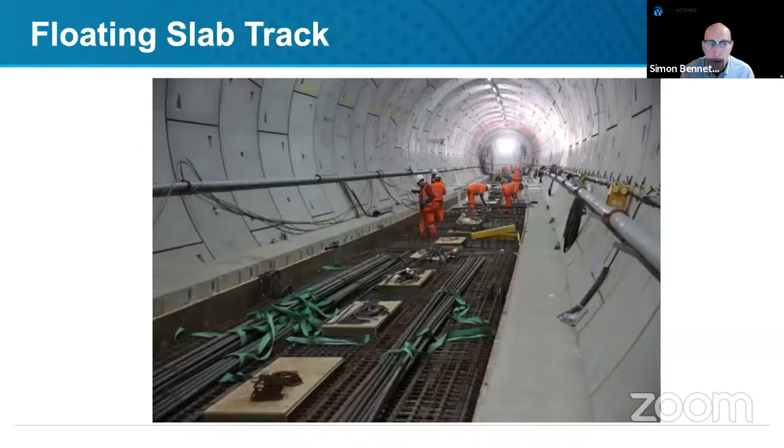We have the station systems, and the big issue has been systems integration, making sure all these systems work together, particularly where there's an interface between the running railway and the station. The train is the point at which those link together. And the key part is the signalling system.

The train has to be able to operate in each of those systems and hand over at the points where it moves from one into the other. Getting that software right so the train can talk to each of those signalling systems, and then when it pulls into a station that it can talk to the station systems so the platform edge doors are controlled with the train, has been one of the biggest challenges on the programme, and is one of the reasons we've spent several years now beyond the time we were expected to open.

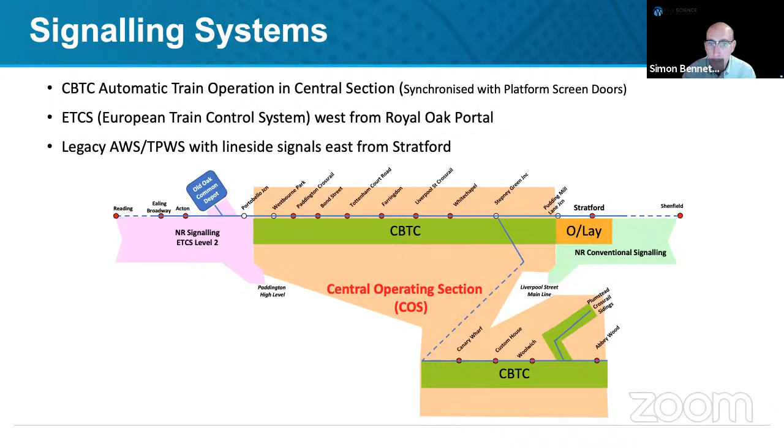While it's a National Railway size train with overhead line electrification, different to the tube, it does have a continuous walkway all the way through the carriages, and the vast majority of seating is longitudinal on the side, creating a great deal of standing space, so that in the central section of London it can have the highest possible capacity. These trains are air conditioned, which is a new thing for the tube.

Most people who use the Underground will know that every other line on the Underground is not air conditioned, and they are much longer and larger than the sorts of trains we have at the moment.

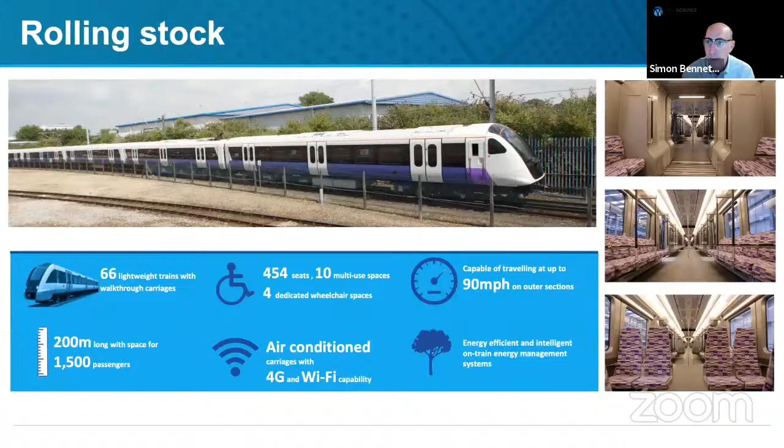Those surface sections, while a smaller part of the scheme, were also important to the project, and they required upgrading, in some cases providing overhead line electrification, and rebuilding stations to lengthen them for the longer trains and to provide new ticket halls.

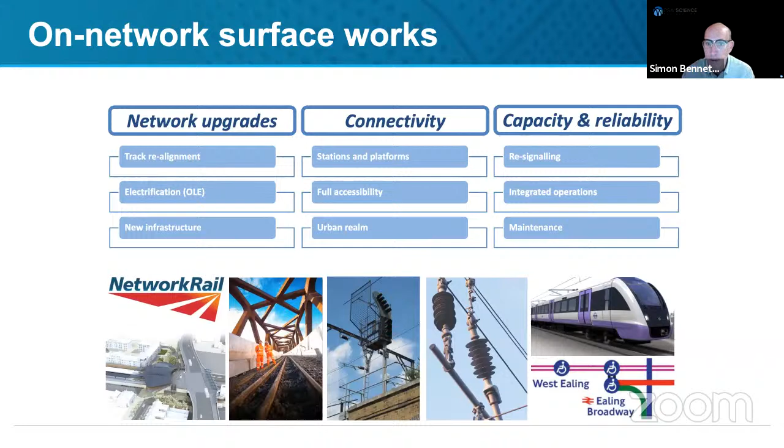Some of these pictures show our new flyover that we had to build so that the tracks into Heathrow had a second route, which is this area here.

This is Ilford Station, and this is Acton Main Line Station. This is the new station building, and this is the old one. So you can see we're building significantly larger stations to cater for the numbers of people we expect to use the new railway.

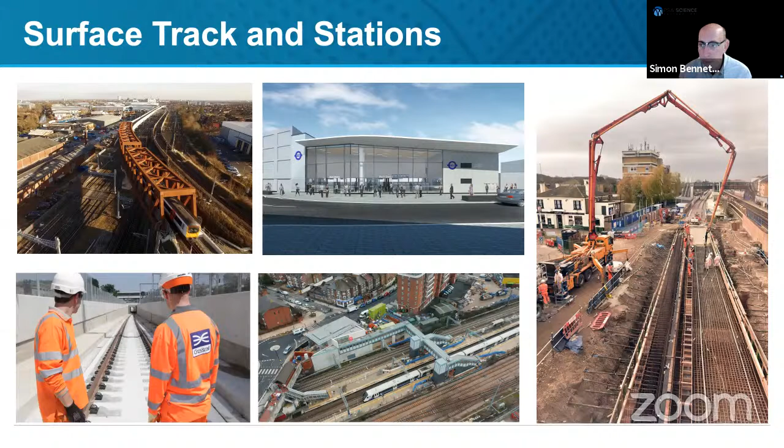So we are now in our commissioning and handover phase. We've handed over 2 stations, Custom House and Farringdon, to Transport for London, and are in the very last stages of Tottenham Court Road as we speak. Throughout this year, all the central section stations except Bond Street will be handed over.

We're now moving into trial running. So we have changed from being a construction site on which trains can be run to do testing, to a railway on which we have to get permission to finish the construction. So we are now an operating railway. While not carrying passengers, we run on the same rules the existing railways do.

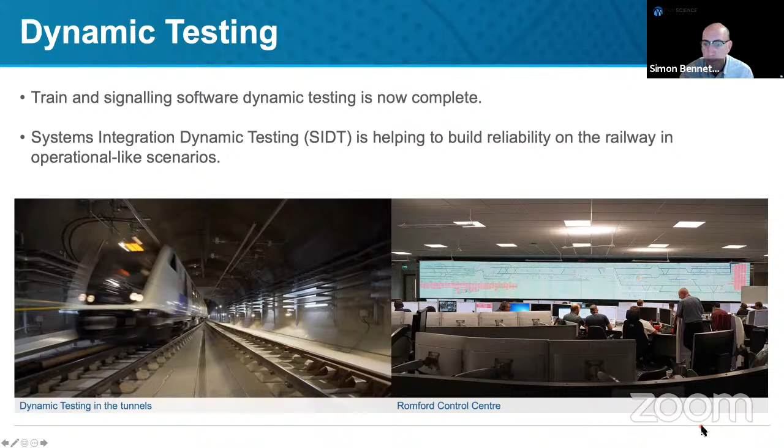So the opening phases for the scheme, we already have delivered stages 1, 2A and 5A. These numbers are out of sequence now because the project is delayed from its original opening date. But the really key part is the stage where we open the central section - that is stage 3.

That's expected to open in the first half of 2022, and we'll be running trains then from Abbey Wood through to Paddington through that central section. However, we will essentially have 3 separate railways: the existing line into Paddington High Level, the existing line in the east to Liverpool Street High Level, and the central section. We'll bring the whole thing together in the following year, throughout '22 or into early 2023 - certainly by the end of '22 is the plan - so that we will then have the full 24 train per hour service in the central section in the peaks.

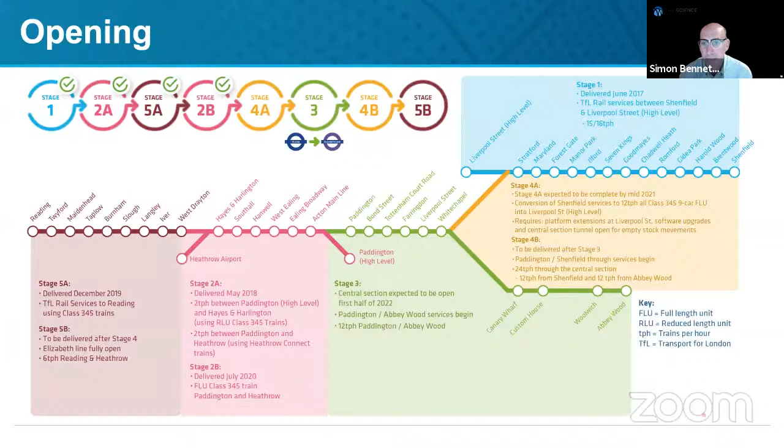I'd just like to take a few slides now to talk about our sustainability story, because there are a couple of things that I think are particularly important about the way we approach the project. We have looked at the carbon impact of the project, and based on the predictions at the beginning of the scheme, we've delivered a reduction of 11% against the carbon that was expected to be embodied in the project.

And we've done several other important things, including using the excavated material from our tunnelling to create a new wetland habitat out towards the east, more or less in the Thames estuary, a little bit round the coast, on a piece of land which was reclaimed, where the seawall has been breached, and the excavated material from Crossrail has been used to create bunds. This is going to create a new wetland habitat for birds, for the Royal Society for the Protection of Birds.

And then one of the areas which people are always particularly interested in is the archaeology. In some cases, we're obviously building stations. The tunnel boring machines go below the level of any human interaction with the ground. But at station sites, we were in some cases digging into roads which had not been dug over many times.

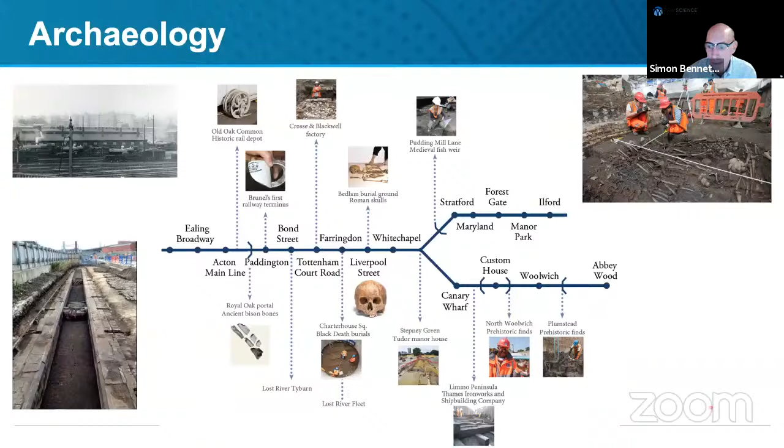And finally, this is the work that I now do, the Crossrail Learning Legacy. We work with the professional institutions in the UK and with our successor major projects to collate the work we have done and create papers based on our experience. This presentation is an example of that, where we want to share what we have done so that others can learn from it, take what we've done that is good, and learn from where we could have done things better. We have a Crossrail Learning Legacy website, and I'd recommend anybody going to look at that and looking at the 12 themes within it and anything that would interest them in terms of how a major project is built.

So that's the end of the presentation, and I think I'll now pass over to Larry, who will manage the questions. Thank you.